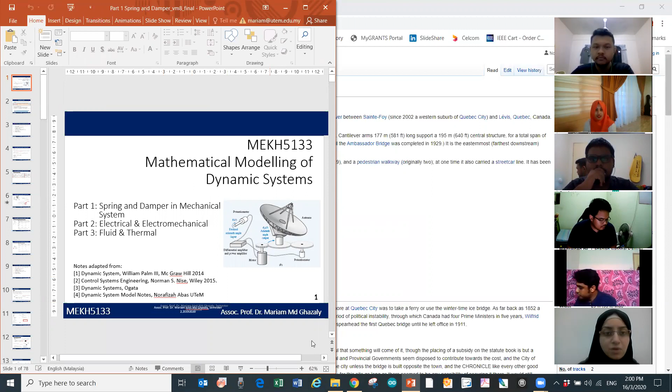Okay, Kugan, belakang tu siapa? Oh, your housemate, Arif. Ya, Arif. Okay, belakang dia ada seorang lagi you punya.

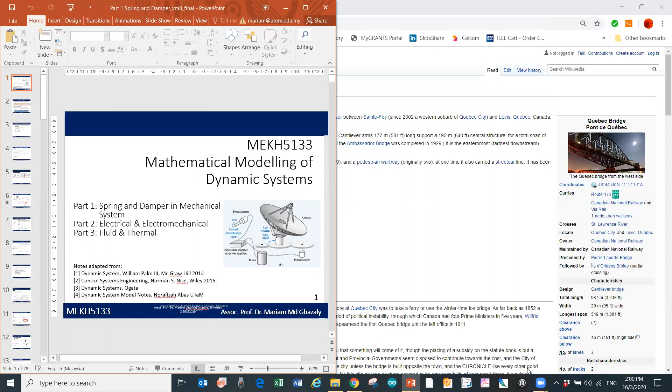Yes, already, okay. So what you are going to learn today is basically an expansion of what you have learned in control system engineering. In control 1 and control 2, you learned how to do mathematical modeling for the system, but you only learned about mass spring damper and electromechanical systems. For this master's course today, you're going to learn those two parts, and also another one on fluid and thermal. I'm going to be quite fast because you already have the background of dynamic modeling.

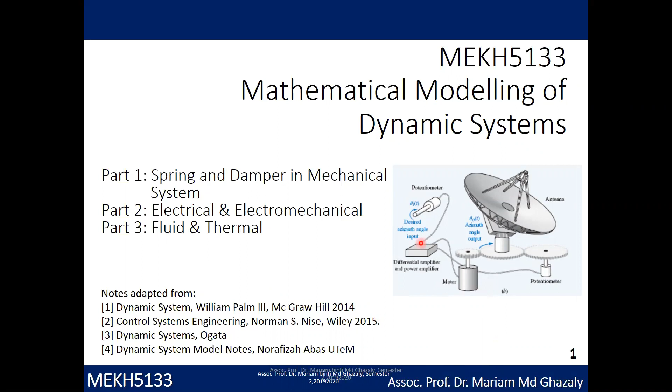So let's see the learning outcomes you are going to achieve by the end of this topic. For part 1, part 2, and part 3, it's to derive the mathematical modeling of dynamic systems in frequency and time domain. This means introducing methods for predicting dynamic behavior of physical systems - for example, you have a spring, so how do you actually model that system? You can have mechanical, electrical, fluid, and thermal elements. This is what you're going to learn this week with me.

After the course, you'll be able to build a mathematical model of a physical system from first principles - mostly second order. Second, analyze behavior of the system using the built mathematical model. After you model everything, you come up with a transfer function, and then convert it to a Simulink or MATLAB block. Lastly, you'll use the software tool MATLAB or Simulink for modeling, simulation, and analysis.

I think most of you are doing project 1 for master's, correct? Yes, right? So if you're doing some sort of research on a controller, you're going to have a system. The system might be mechanical, or a combination of mechanical and electrical - an electromechanical system. So you have a mass, a damper, and so on. How do you actually represent that system in a simple way? This is what you're going to do - model it into a transfer function.

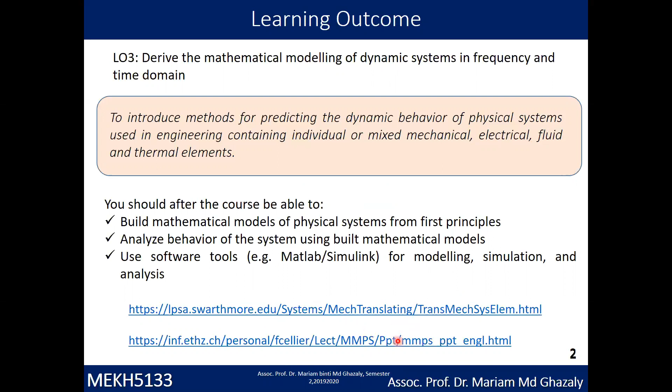Below here you can refer to the link I gave you. If you see here, there are lots of parts under part 1, spring and damper - we have 8 main topics: overview, what are spring elements, modeling mass spring system, what is damping element. You learned about mass systems previously with Dr. Norafizah, so now you're going to continue modeling for mass, spring, and damper systems. Then the energy method, where I'll briefly explain the equations used when you have spring, mass, and damper. And lastly, MATLAB application.

After you've learned from the first part through part 7, you'll be able to come up with a transfer function. From that transfer function, you're going to convert it into a MATLAB application - doing the modeling. A system has an input and an output, so how do you model it? If the input is a step input, what is the response of the system, right?

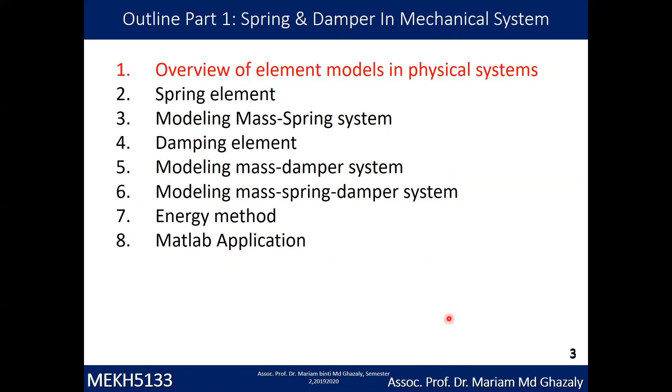Okay, next is just an overview. A system is a collection of components which are coordinated together to perform a function. A system is a defined part of the real world, so we are going to simplify it into what are the inputs to a system and what are the disturbances.

Example, we take a very simple dynamic system: aircraft, car, robot, antenna position. So for example, we take a car. The car, what is the aim of the car? To actually control the speed of the car. So what are the inputs?

Any idea? You guys can respond, eh? What are the inputs to a car if the output is the speed? Fuel. The fuel, yeah? Okay, the fuel means the acceleration, right? The fuel means the pedal. Okay, input is the fuel, which is the input, a signal or something, a pedal.

Okay, so a car is normally an open loop system because you do not have any feedback. You have a feedback, but the feedback is actually the human doing all the feedback. You control it. If you're near the front car, you press the brake pedal. If you have a distance, then you will actually speed up. So the human is the one in control.

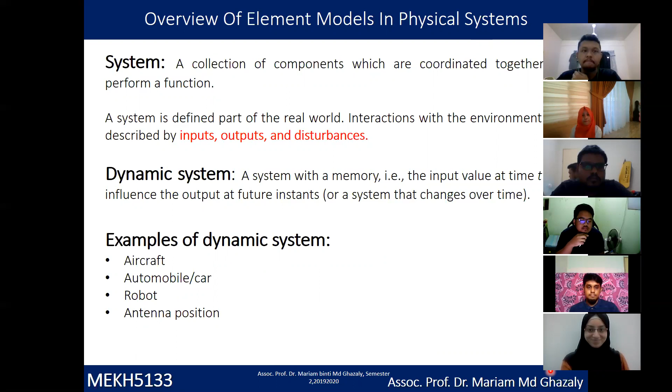But if you're talking about a car, that will be a much more complicated system, right? So a dynamic system is a system with memory. You have the input value at time t that influences the output at a future instant. So you have an output that changes over time.

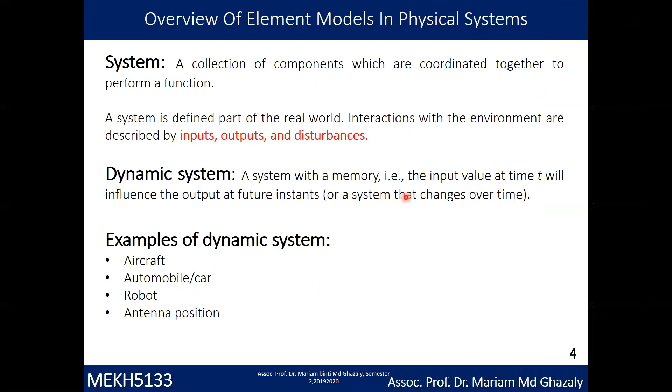Okay, so let's just look at what are the modeling steps. There are a few steps to do this modeling. So the first step is to determine what are the physical system requirements. Requirement means what are the inputs to the system, what is the output. Example, we take a simple example of a motor, DC motor.

The DC motor, the output is a rotation. But when you want to rotate the motor, what happens is that you need to have the input, which is a voltage input. So you determine what is the input and what is the output. From there, you need to determine the dynamics of the motor itself. So what's inside? You have mass inside, the rotor is the mass. What else? Do you have a damper inside? And so on. Okay, so that is the first step.

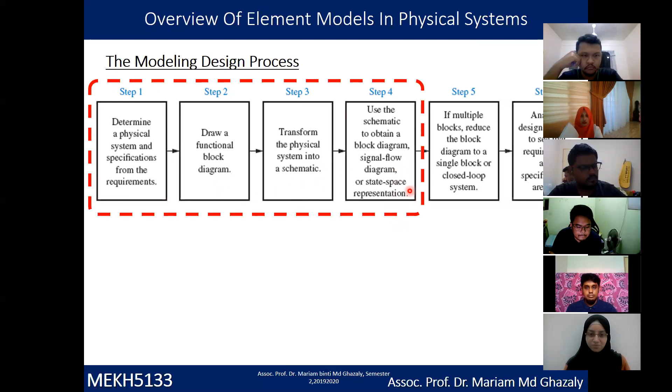Second step is to draw the functional block diagram, then draw the block transfer function. Third one is transform the physical system into a schematic. Fourth one is obtain the signal flow graph, and so on. And lastly, if you want to convert it into a closed loop, you need the output compared with the input, then you will get an error. So then you see what are the output responses.

Example, you want to see the response of the motor based on what reference that you set. Reference 10 degrees, 10 degrees, 40 degrees, and so on.

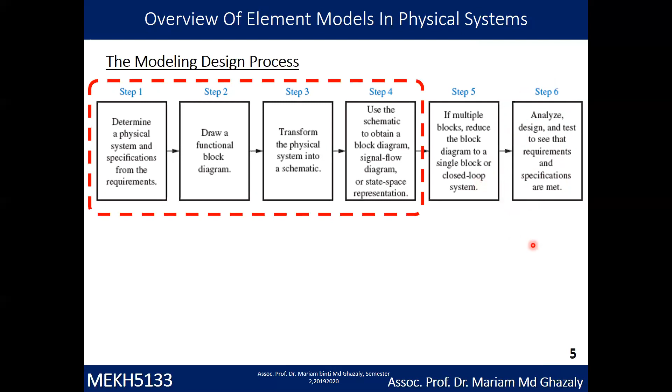So this is an example. You have an antenna. The antenna here is connected to a motor. You have learned in the previous chapter with the Torsional system that when you have a DC motor output or torque, we call it the inertia, you connect it to a gearing system. The reason you add it to a gearing system is to increase or reduce a torque value. So you have the motor connected to a gearing system and it will actually rotate the antenna.

And then you have the input azimuth here as the input reference. So if you look at this schematic here, you will see that this schematic represents this system. You have the input azimuth here, you have the dynamic models inside here, you have the motor, you have the amplifier, you have the pre-amplifier, the armature here, which is the motor transmission of the system, and then you have the gearing. After the motor, you have the gearing here.

So you see that there's a gear N1, N2, N3. Then N2 gear is connected to the load, which is the inertia JL. So we have JL here, and then it will actually give the output to the azimuth antenna.

Okay, from here you convert it into a block diagram. So when you convert it to a block diagram, you can draw this out again as the plant or process itself: motor, load, and gear as one block. And then you have the controller, signal, and power amplifier, which is the controller part. Then, in order for you to read what is the output angle, you need to have a sensor, which is the potentiometer, so it will read what are the angular output.

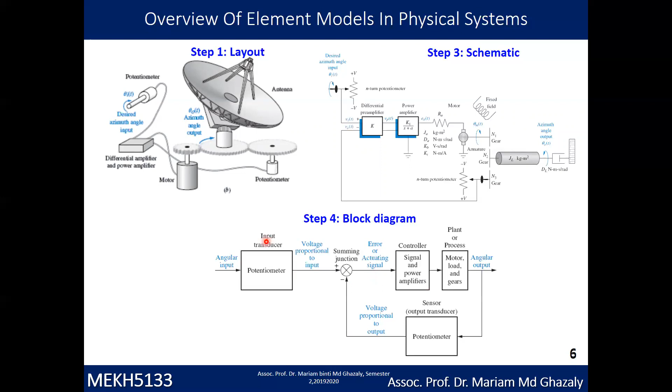Okay, so this output will be compared with the reference that you set. This reference that you set is actually the reference of the azimuth angle that you want. For example, you want to rotate it 30 degrees, so you set the degree at this end part, front part.

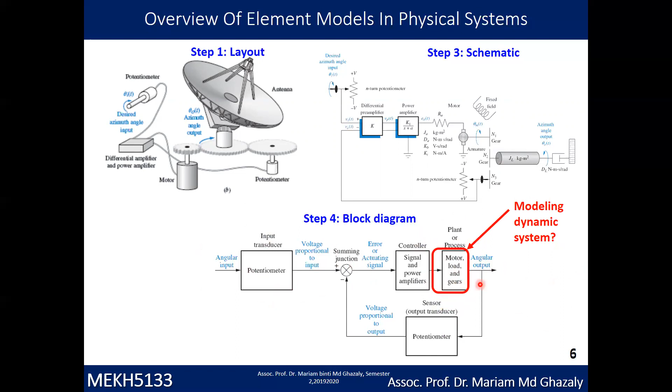Okay, so the idea here is we're not talking about everything right now. Later on you are going to learn about everything from the input until the output with a closed loop with Dr. Chong next week. But my part is to explain only the mathematical modeling of the dynamic system here for this part, plant or process.

Everybody okay? Am I too fast? Okay.

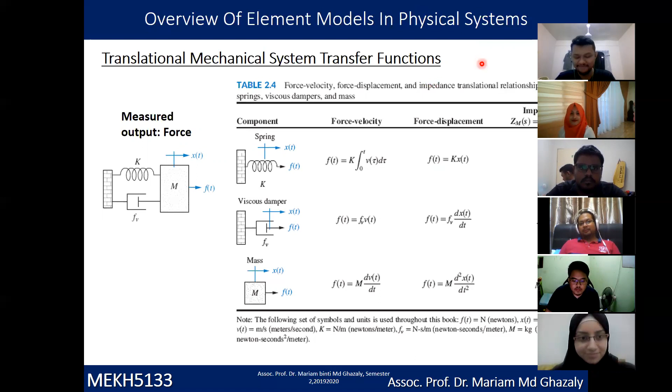Okay, let's continue. So we go to the first part, which is the translational mechanical system. Translational mechanical system is about a mass that is moving in the horizontal or vertical position. So example, you have this mass value, mass. Translation means that it's going to move in linear position, either in the x-axis or y-axis.

So this is what we call as translational mechanical system. From here you can see that we can actually represent it in terms of mass, damper, and spring. You have learned about mass last week. So you have mass, damper, and spring, and this one is represented as the component spring, xt, F as a force. Imagine that if you have a spring, you pull the spring - this is fixed area, you pull it to the right, then this is the force direction, and the direction of the spring xt is also the same as the force.

So you can actually write that equation as force displacement: ft equal to kxt, where k is the coefficient for spring. And for viscous damper is the same thing - you have a damper force, you pull it in one direction, xt will be the same direction as the force, so it can be written as the differentiation of xt, giving ft equal to fv dx/dt. And for mass, ft equal to m d2x/dt2.

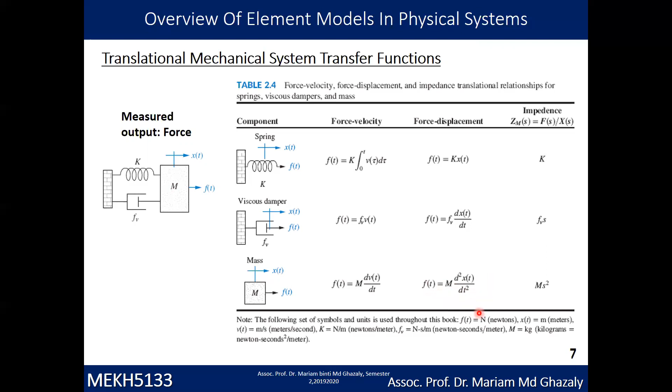And by comparison, you also have the rotational mechanical system. Imagine that this one, instead of a mass, is actually a rotational system, or motor - it's going to rotate instead of moving translational or linear motion, so it's going to rotate at this axis. You can represent this as spring, viscous, and inertia.

Let's take it as... let me draw that first. Here you have mass, you have C, and then you have K - this one is for linear motion. Can you see the whiteboard? Is it clear? Yes. Okay, this is linear motion and this is rotary motion.

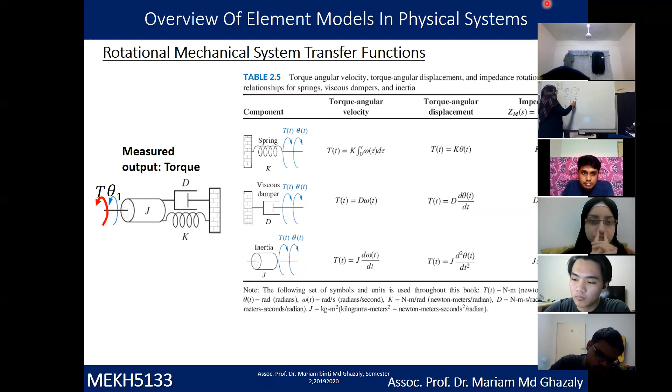Rotary motion we have J, which is inertia. For C, they are using D, and for K, they are using spring, K juga, okay. So for linear motion, the representative of the rotary is J for inertia and mass, C is represented by D, and spring uses K value. So if you see here, you can write out the equation as this equation: T equal K theta, which is the output. So this one, the output is XT.

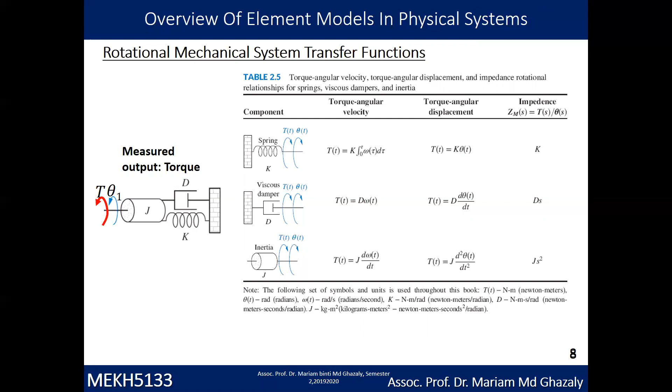We write out in this space, so we can write it in X double dot, X dot, and X, and we have J theta double dot, D theta dot, and K theta. That is how you write out the representation of the rotary transfer function. Now we go to the spring element.

Just a recap: mass is assumed to be rigid where object motion is relatively uncomplicated, simple translation or simple rotation. I just explained that mass and J can be represented as simple translation, linear motion, or rotation. But in many applications, mass deforms under action of force or is connected to another object by an element of deformation. Because of that, you need to have the spring element.

Example of a spring element is the helical coil spring. So this is an example of a helical coil spring. We have the K value, so F is equal to Kx. The purpose here is to provide a restoration force.

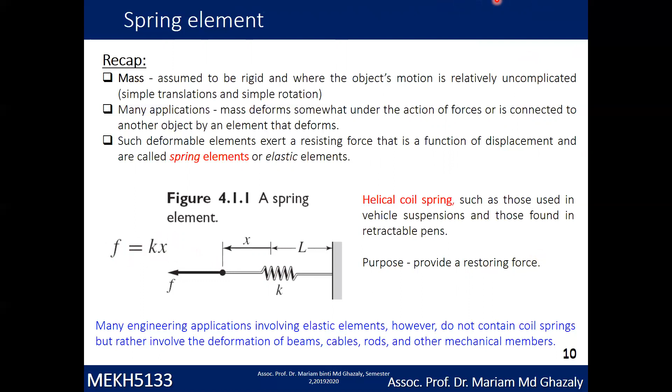An example of a helical spring, coil spring, a very simple example is in your pen. You have a spring inside here. That's why when you actually click it back, it will restore to the normal position. That is a very simple example of a helical spring.

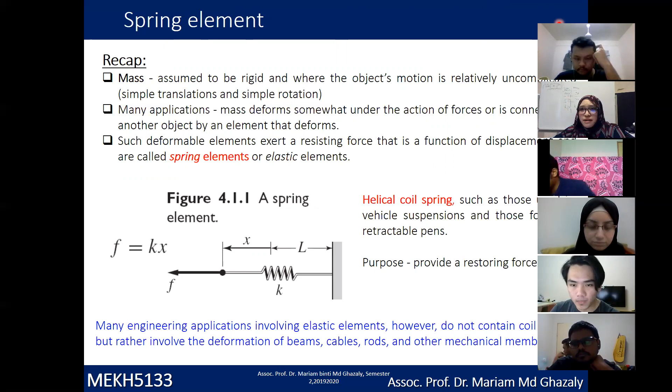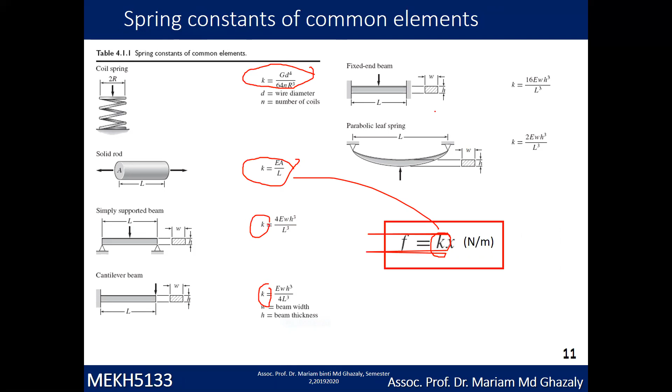Initially, for the normal helical spring, F is equal to Kx. This K value can actually be changed, as with this pointer pen, to a different K value depending on what spring type you are using in that system.

Let's go to the first one: force deflection. For the linear force deflection model here, you are using Hooke's law. The force is given by Kx, where X is the extension or compression distance, K is the spring constant, and the force unit is Newton over meter.

Based on this figure, L is the free length of the spring when there is no compression. That is where L is this value. When there is a deflection, then you have a restoring force.

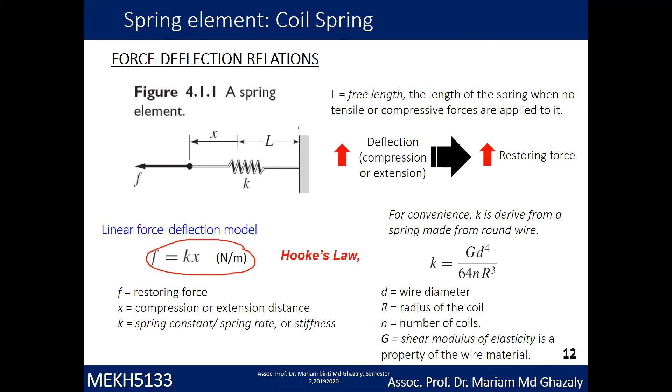If you derive this equation, you will find that K is equal to GD to the power of 4 over 64 R cubed N, where D is the wire diameter, R is the radius of the coil, N is the number of coils, and G is the shear modulus of elasticity of the material. This is more detailed compared to the previous equation F equal to Kx. So K for this spring element is given by this value.

For the solid rod, the example here is to derive the spring constant K for a solid rod, an expression for a cylindrical steel rod subjected to tensile or compression force. Meaning if you have a rod, you compress it or pull it, so it actually represents a spring element.

To get the value of K, we start with F equal to Kx, and we find K equals EA over L. E is the modulus of elasticity of the material, depending on what type of material you are using. A is the cross-sectional area, and L is the length of the rod. So you get K equal to EA over L.

From here you can substitute it, then you get X equal to L over EA times F, and then in the end you can derive F equal to EA over L times X. This gives you the spring coefficient. So for the solid rod, you can directly get K equal to EA over L.

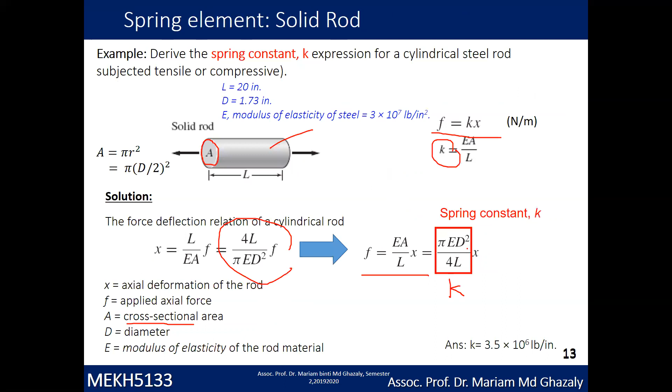Anyone want to ask a question? No? Okay, not yet. Nobody is sleeping, nobody going out, not yet, okay. So we try to do this e-learning class. I'm actually talking without looking at you, so it's like talking to myself.

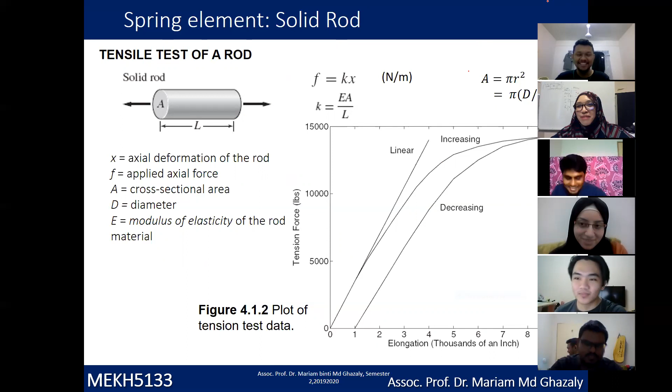Right, let's go to one example shown here. What is the tensile test of a rod? So you have a rod here, okay. Given you have already derived just now, K equals EA over L, and A is given by the cross-sectional area here.

Let's see the plot area here, a plot of tension test data. You plot the data. Linear means that when you pull it, it will actually go back to the original position. Means that if you were to pull it, it will actually go up to this point and then go back to the same point again.

But if you see here, there are two lines, increasing and decreasing. What does it mean? For example, imagine you have a spring just now. You pull the spring until it's actually deformed. When you release it, does the spring go back to the original position? No, because it's already deformed. You already pulled it more than the K value. The modulus means the K value you already calculated just now. But if you pull it more than the K value, then if you release the spring, it won't go back to the original position. So this is what it means.

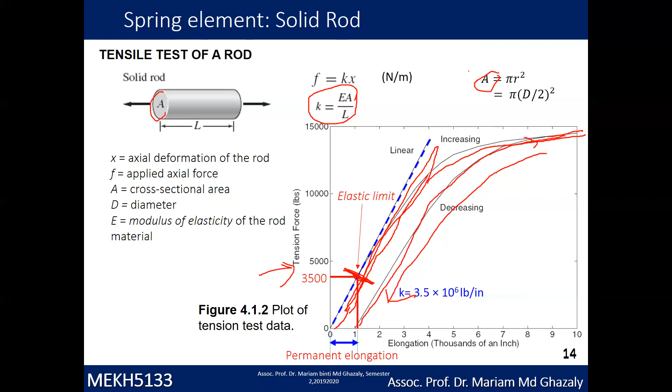So we skip this. Moment of inertia is what you have learned before. Moment of inertia is that when you have a mass, so mass moment of inertia is angular mass or rotational inertia. So you have the inertia, it either rotates at this point, or this point, or this point. Based on this, you will get the I value.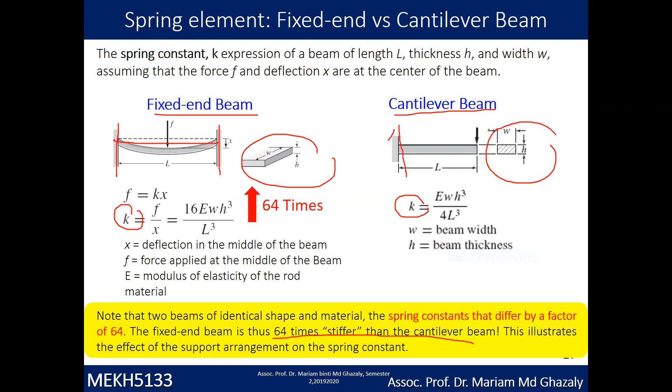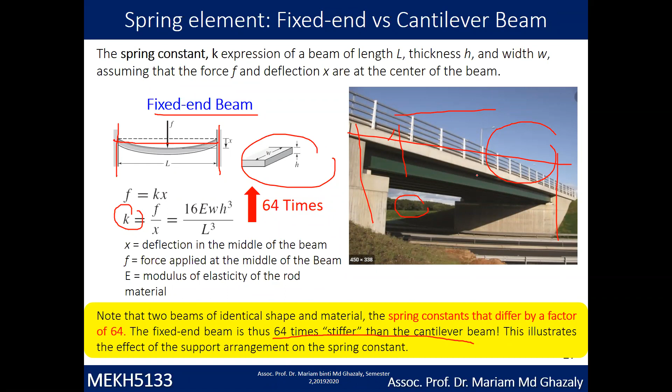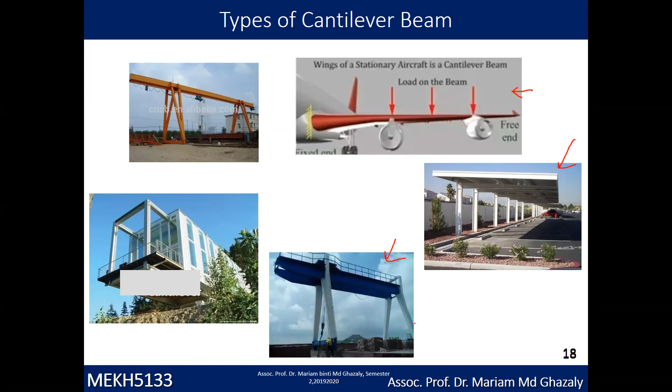So this one is an example of a cantilever beam. The wing part of the airplane, and also this parking space, is an example of a cantilever beam.

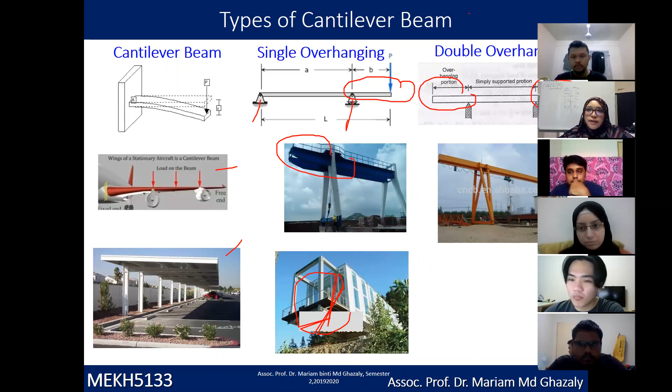I just want to show you, share with you something. Have you heard about the iron ring? Have you heard about this iron ring? No? No iron ring? No.

Actually, the iron ring is something that engineers in Canada wear. They receive an iron ring after they graduate from university. So it represents the ethics of an engineer.

There's actually a history behind it. This iron ring is given to those who graduate from Canadian universities. The ring is made from iron, but lately they make it from stainless steel because of the corrosion of the iron. So when people wear it, your hand becomes black.

The history behind it is the Quebec bridge. Maybe you can Google this. What happened is that this Quebec bridge was built, and it actually crashed twice due to the engineer who designed this bridge, because of miscalculation of the beam.

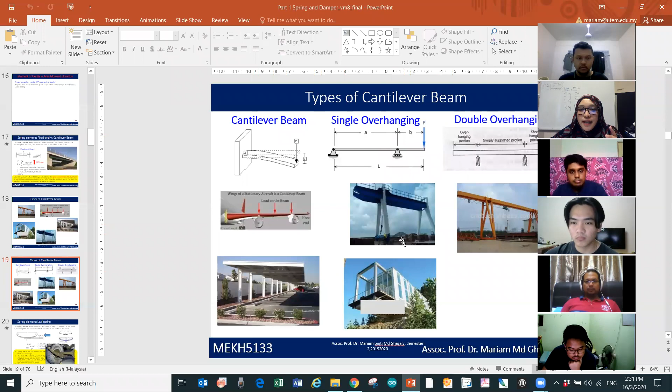The beam, if you see here, the Quebec bridge design—this is the design of the Quebec bridge, which is actually a fixed beam or cantilever beam type. So you have two fixed beams here at this side. What happened is that halfway through building this, this part actually deformed and the beam crashed into the ocean.

This bridge took 30 years to actually build. During the building part, 88 engineers or workers died because of the miscalculation of the engineer. So that is what happened.

They actually gave the ring. The ring was made from a part of the bridge itself, so from iron material.

Means that if you become an engineer later on—are you going to become an engineer later on? You guys? No? Hopefully. Okay, so if you become an engineer, make sure that you calculate it correctly. If not, you're going to make people lose families and so on.

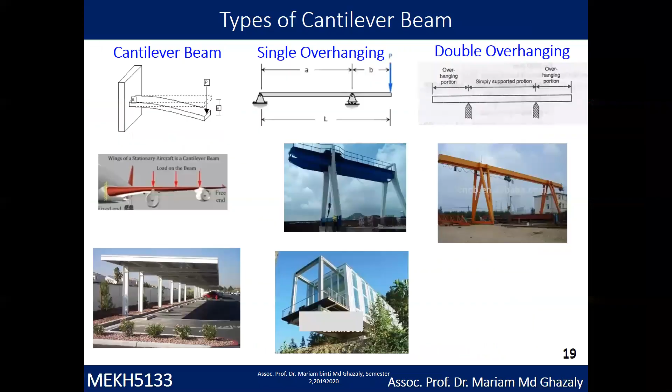You can try to Google that. Okay, so let's continue. Next is the leaf spring.

Leaf spring is—anyone heard about what is leaf spring? No? Anyone know what leaf spring is? No. Car suspension? Yes, correct, car suspension. Who answered that? Danny. Danny, okay, correct, that's correct.

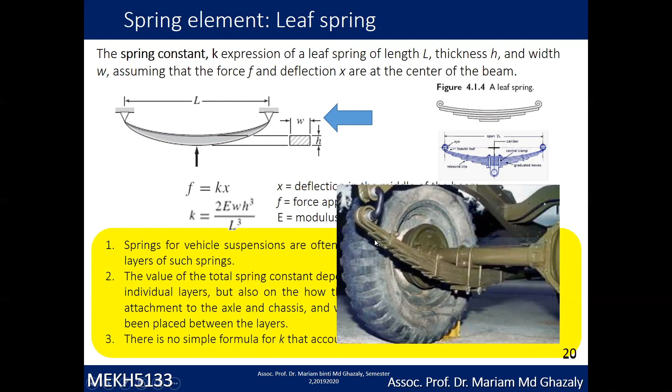You see here, this was an example of a car suspension. This is under a lorry. So you have the leaf spring here, the axle here of the tire, and then it's connected to the body or frame of the lorry.

So the spring, the K spring, is expressed in terms of length L, thickness H, and width, assuming that force and deflection are at the center of the beam. But the spring for vehicle suspension is constructed by strapping together several layers of springs. So for example, you have the first layer of spring, second and third, strapped together, so you get a leaf spring there.

So how to calculate that—there is a calculation, because each spring might not have the same width and height. But anyway, the calculation of K for the spring is given by this value: K equals 2EWH to the power of 3 over L to the power of 3. E is the modulus of elasticity of the material itself.

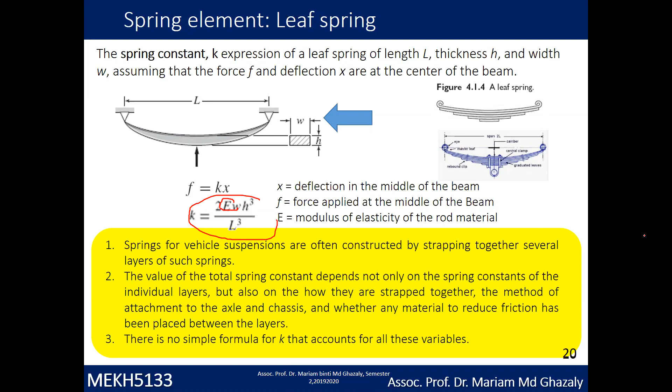What time is it? 2:35.